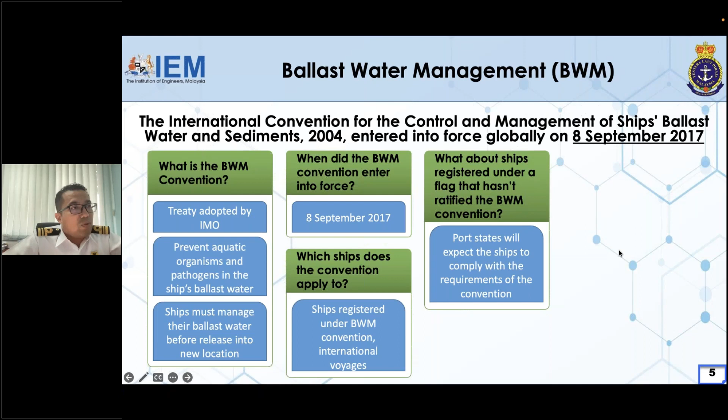A ballast water record book is used to record when ballast water is taken on board, circulated or treated for ballast water management purposes, and discharged into the sea. It should also record when ballast water is discharged to a reception facility, or any accidental or other exceptional discharge of ballast water.

And the International Ballast Water Management Certificate is for ships of 400 gross tons and above. This is issued by or on behalf of the administration, the flag state, and certifies that the ship carries out ballast water management in accordance with the BWM Convention, specifying which standard the ship is complying with, as well as the date of expiry of the certificate.

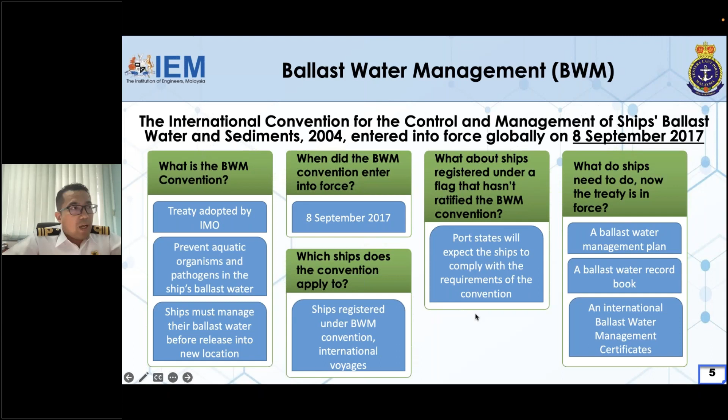The D1 standard requires ships to exchange ballast water in open seas, away from coastal areas, so organisms cannot survive. The D2 standard specifies the maximum amount of viable organisms allowed to be discharged, including specified indicator microbes harmful to human health. Usually, meeting the D2 standard involves installing a ballast water management system.

For background info, all new ships must conform to the D2 standard. Until the date when they must meet D2, existing ships should exchange ballast water mid-ocean to meet the D1 standard. Over time, all ships will have to meet the D2 standard. The renewal survey refers to the IOPPC renewal survey under MARPOL Annex 1.

In 2017, all ships must have the ballast water management plan, ballast water record book, and international ballast water management certificate. Existing ships built prior to 8 September 2017 must meet the D1 standard until their D2 compliance date. New ships built on or after 8 September 2017 must meet the D2 standard.

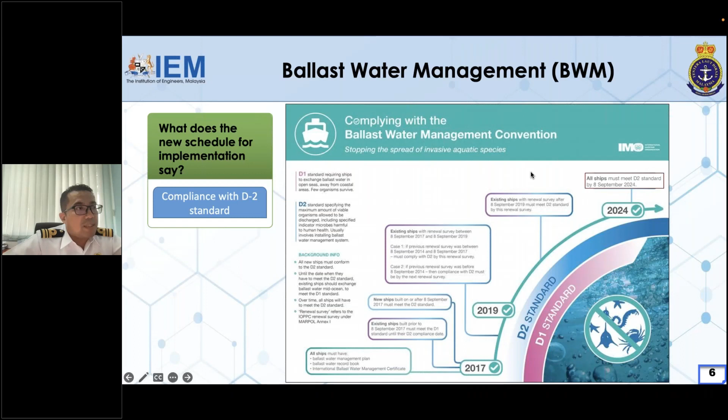Annex 1 is the prevention of pollution by oil. Annex 2 is the control of pollution by noxious liquid substances in bulk. Annex 3 is the prevention of pollution by harmful substances carried by sea in package form. Annex 4 is the prevention of pollution by sewage from ships. Annex 5 is the prevention of pollution by garbage from ships, and Annex 6 is the prevention of air pollution from ships.

MARPOL's main objective is to safeguard against accidental pollution from ships' routine operations and protect the marine environment from ship-source pollution. This convention applies to all ships flying the flag of a member state, or operating within its jurisdiction, including vessels of any type operating in the marine environment such as hydrofoil boats, air cushion vehicles, submersibles, floating craft, and fixed or floating platforms.

Government vessels, including warships, naval and state-operated, non-commercial government ships, are not bound by this convention. I have attached some notes about the duty of the master, which means the ship's captain, to report an incident to the coastal state and flag state or regulation implementers.

Duty of the flag, meaning the marine department, involves casualty investigation, certification, and IMO reporting. Last but not least, the duty of the coastal state involves ship inspection and port facilities. The coastal state can be our marine department if the incident occurs within our nation, or a foreign country's marine department if it occurs outside our country.

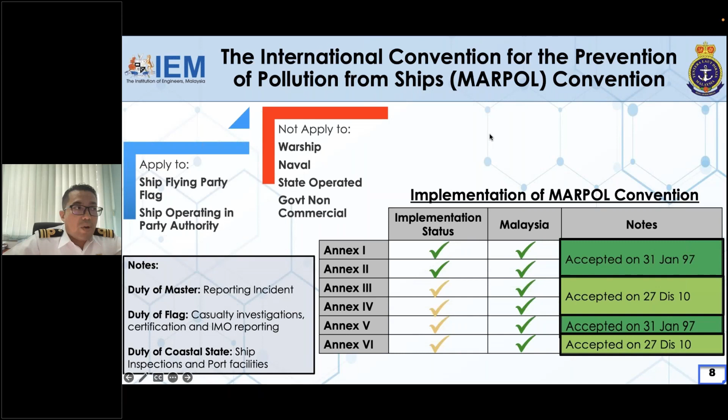The flag may waive requirements exclusively for domestic ships which have a 72 hour voyage plus 50 nautical miles, but those ships shall retain all oil mixture on board for subsequent discharge to reception facilities. The flag may exempt ships temporarily for 90 days.

It provides regulation of oily water separator, oil discharge monitoring equipment, and oil record book to record all oil plus fuel transfer and capacity. Strict design of tankers to be built with double hull and double bottom constructions. Coastal states must provide regulated port reception facilities for oil discharge and loading.

Certification of International Oil Pollution Prevention, 5 years validity plus annual survey, plus a damage control plan, the Shipboard Oil Pollution Emergency Plan, SOPEP.

For Annex 2, it applies to all chemical tanker ships certified to carry NLS. The exception for this annex is the discharge of NLS to sea to save life at sea, or when the ship or equipment is damaged, with reasonable precaution taken. The flag may exempt any waived requirement, but it must be reported to IMO.

Exceptions include ships which carry vegetable oil, ships constructed before July 1986, ships with restricted domestic voyage, or dedicated NLS tanks in ships that are only used for ballast and washing.

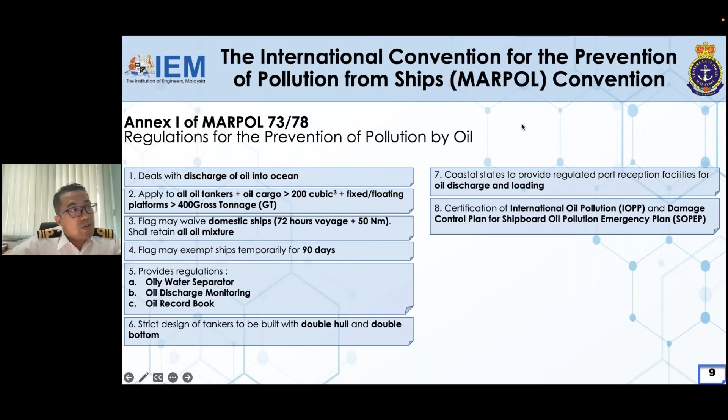The OS category will not fall under X, Y, Z categories and presents no harm to the marine environment and human health. The ship must have procedures and arrangement manuals for X, Y, and Z discharge, plus a shipboard marine pollution emergency plan for NLS.

The design and construction of the ship must comply with the International Bulk Chemical Code, the IBC Code, for ships built after July 1986. The requirement applies to NLS certified ships which carry cargo specified in the IBC code.

Mandatory logs of NLS in the cargo record book. All states party must provide reception facilities for discharging NLS. Ships must comply with the pre-wash of NLS tanks regulation plus the residue assessment.

The certification involved in this annex is the International Pollution Prevention Certificate for the carriage of NLS, which has 5 years validity plus annual survey.

For Annex 3, it applies to ships that are certified to carry HSPF, harmful substances carried by sea in packaged form. It covers the type of cargo carried under the International Maritime Dangerous Goods Code, IMDG code, and ships are required to have proper HSPF packing, marking, labeling, documentation, stowage, and quantity limitation.

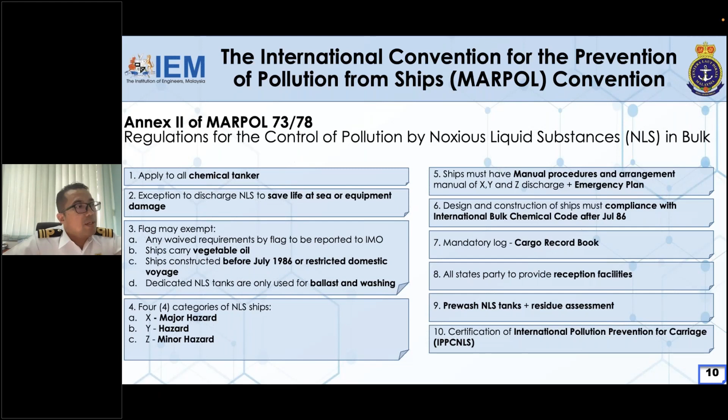The criteria for identification of HSPF are short-term aquatic hazard and long-term aquatic hazard. For the short-term aquatic hazard, the classification purpose means the hazard of a chemical caused by its acute toxicity to an organism during short-term aquatic exposure to that chemical. Availability of a substance means the extent to which the substance becomes a soluble or disaggregated species.

For the long-term chronic hazard, it means the hazard of a chemical caused by its chronic toxicity following long-term exposure in the aquatic environment. For this annex, no certification is required.

For Annex 4, sewage means drainage from toilets plus urinals, medical premises, living animal spaces, or a mix from any of those. It applies to ships engaged in international voyage plus above 400 gross tons plus carrying more than 15 persons.

The exception for this annex is the discharge of sewage to sea to save life at sea, or when the ship or equipment is damaged, with reasonable precaution taken.

The ship must be equipped with a standard discharge connection. The flag must ensure or approve that applied ships have a sewage system consisting of a sewage treatment plant, a sewage disinfecting system, or a sewage holding tank.

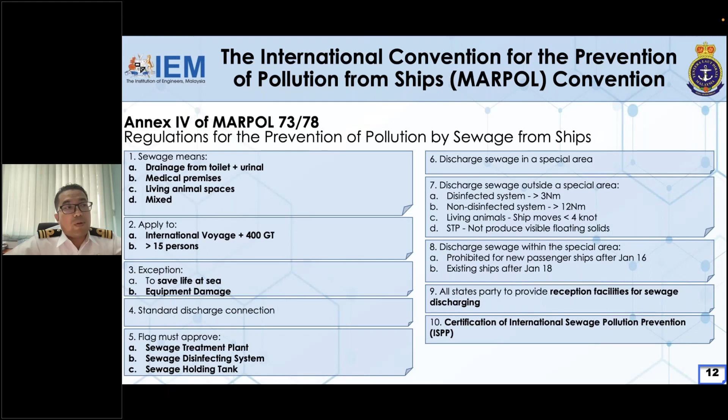Okay, the exception discharge of garbage from a ship is necessary for the purpose of securing the ship or safety of crew, or accidental loss of garbage resulting from damage to a ship or its equipment, or the accidental loss of fishing gear, or discharge of fishing gear from a ship for the protection of the marine environment or for ship or crew safety. The exception is also permissible if food waste presents an imminent health risk to the crew.

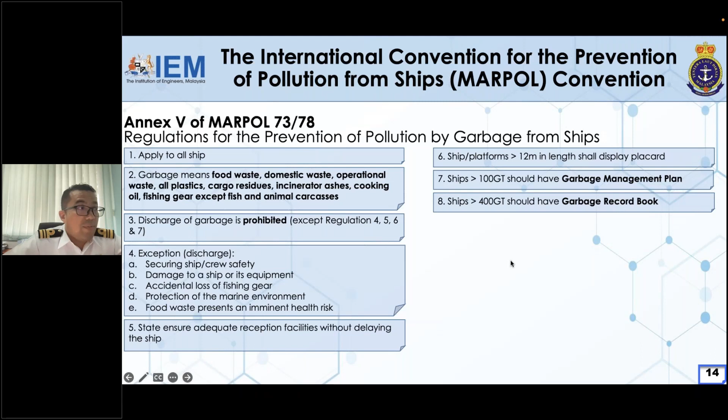Ships must use low sulfur fuel oil, with a target of 3.5% after January 2012, 0.5% after January 2020, and 0.1% for sulfur emission control areas.

A volatile organic compounds, VOC, requirement applies to tankers, which must have a VOC management plan, and VOC is to be reported to IMO. The shipboard incinerator is to be approved by the flag.

So the state party must ensure adequate port reception facilities, fuel oil availability, and promotion of technical cooperation. CO2 emission requirements apply to ships of more than 400 gross tons.

Ships built after January 2017 must comply with the Energy Efficiency Design Index, EEDI. Applicable ships must have a Ship Energy Efficiency Management Plan, SEEMP, and ships more than 5,000 gross tons must report fuel consumption to IMO. The certificate for this annex is the International Air Pollution Prevention Certificate, IAPP, which has 5 years validity plus annual survey.

The International Energy Efficiency Certificate, IEEC, has lifetime issuance without a major conversion or change of flag, and a Statement of Compliance, SOC, will be issued annually.

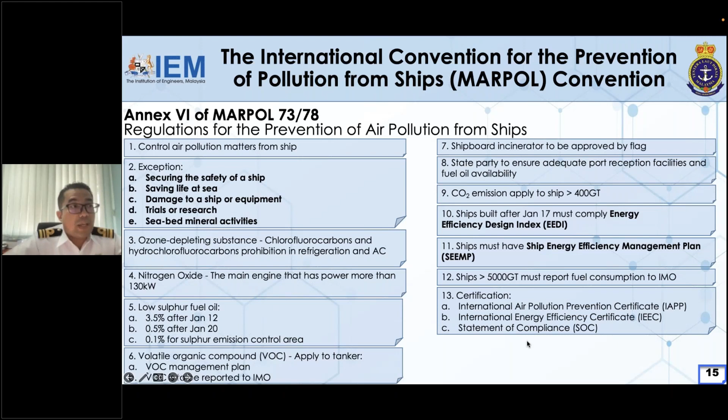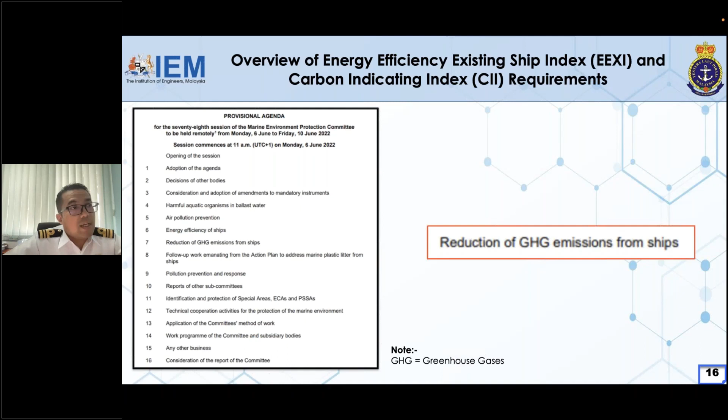The initial GHG strategy was adopted by IMO's Marine Environment Protection Committee (MEPC) during its 72nd session, from 9 to 13 April 2018. Their vision is to reduce GHG emissions from international shipping and phase them out as soon as possible in this century.

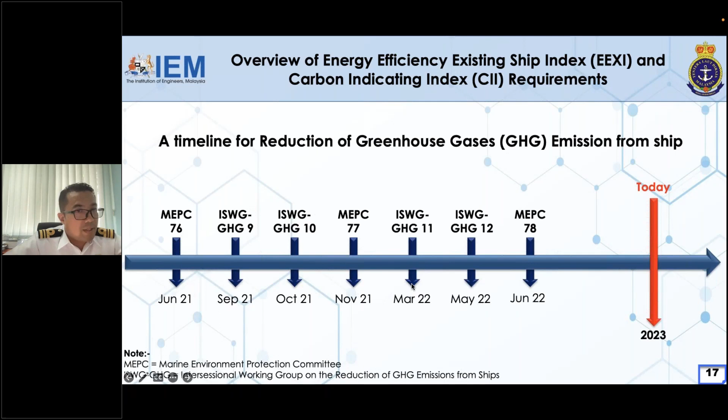So the initial strategy represents a framework for member states: first, setting up the future vision for international shipping; second, the levels of ambition to reduce GHG emissions and guiding principles; and third, candidate short, mid, and long-term measures with possible timelines and their impacts on states. The strategy also identifies barriers and supportive measures, including capacity building, technical cooperation, and research and development (R&D).

The ambition of the GHG strategy is to review EEDI with the aim of strengthening requirements, to reduce the average carbon intensity — CO2 emission per transport work — by 40% by 2030 and 70% by 2050 compared to 2008, and to reduce total GHG emissions from shipping by at least 50% by 2050 compared to 2008.

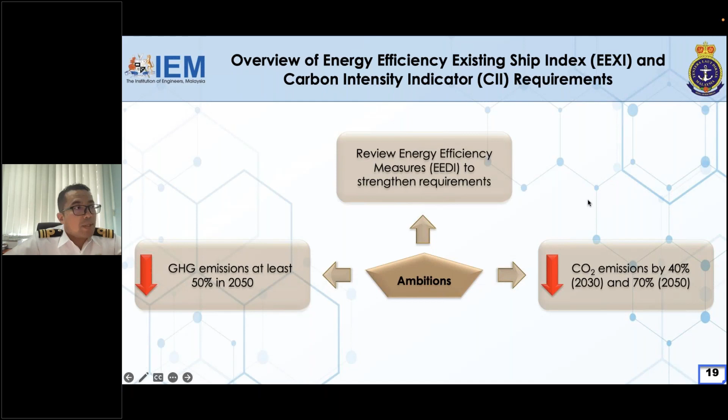After the short-term measures have been carried out, the next step is to implement market-based measures (MBMs). These place a price on GHG emissions and serve two main purposes: to provide an economic incentive for the maritime industry to reduce fuel consumption by investing in more fuel-efficient ships and technologies, and to operate ships in a more energy-efficient manner, resulting in sector reductions. Hopefully, after successful implementation of short and mid-term measures, the long-term measures will result in a zero-carbon environment.

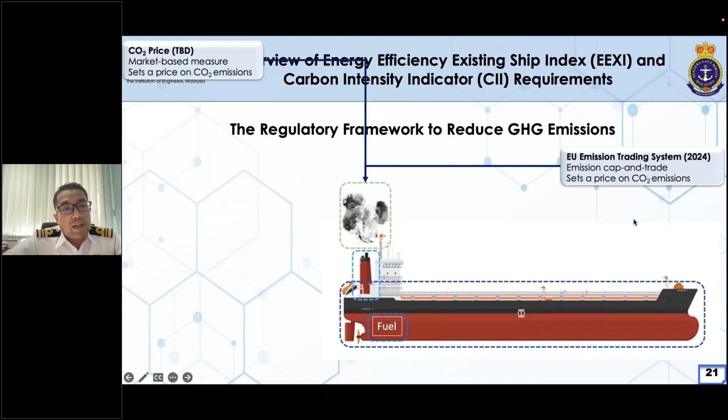Then there's SEEMP3 in 2023, a management requirement for continuous carbon intensity improvement. We also have the data collection system, SEEMP2, from 2019, for reporting actual fuel consumption and CO2 emissions. And SEEMP1 from 2013 is the management requirement for continuous energy efficiency improvement.

We also have the European Monitoring, Reporting and Verification of CO2, EU MRV, from 2018 — reporting of actual fuel consumption and CO2 emissions.

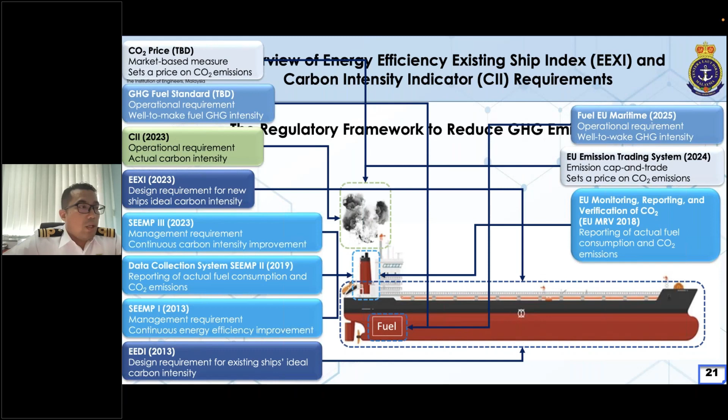There are two short-term approaches. The first is the technical approach, the Energy Efficiency Existing Ship Index (EEXI), which introduces an energy efficiency index for existing ships. The required EEXI is almost the same level as the required EEDI for new ships as of 2023. The second short-term approach is the operational approach, the Carbon Intensity Indicator (CII) rating. The ship is rated on a scale of A to E based on annual operational carbon intensity. A ship rated D for three consecutive years, or rated E, must submit a corrective action plan.

So what are EEXI and CII? The EEXI is a measure of a ship's energy efficiency per transport work — a one-time certification targeting design parameters. The CII addresses actual emissions in operation, measuring how efficiently a ship transports goods or passengers, given in grams of CO2 emitted per cargo carrying capacity and nautical mile. The ship is then given an annual rating ranging from A to E, with the rating thresholds becoming increasingly stringent towards 2030.

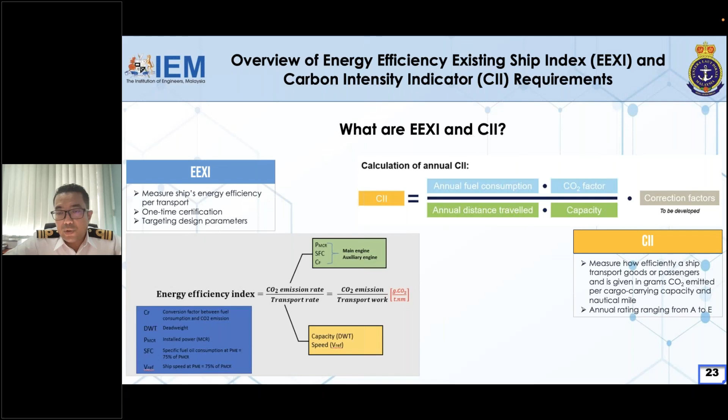We will comply with this. After January 2023, we have complied, and then the IEE certificate will be issued. Then the way forward is to get the new International Energy Efficiency certificate.

So the process: issuance of EEXI technical files, including the EEXI calculation, with responsibility from the ship owner or manager, then submission to class, and approval of the EEXI technical file, for which the classification society is responsible. The EEXI is verified, and the EEXI technical file is kept on board. Then the onboard survey and issuance of a new IEE certificate, with the classification society acting on behalf of the flag state.

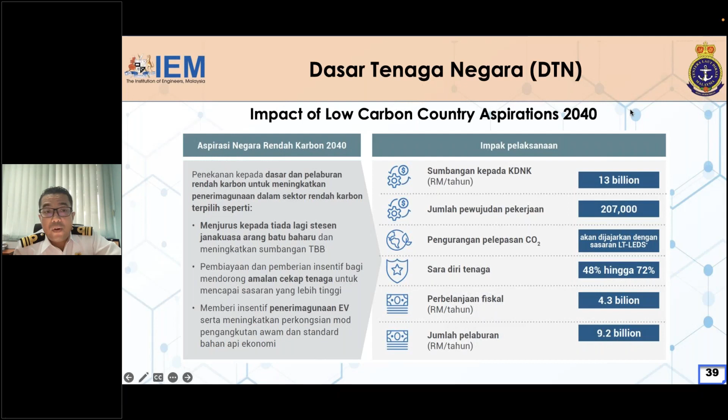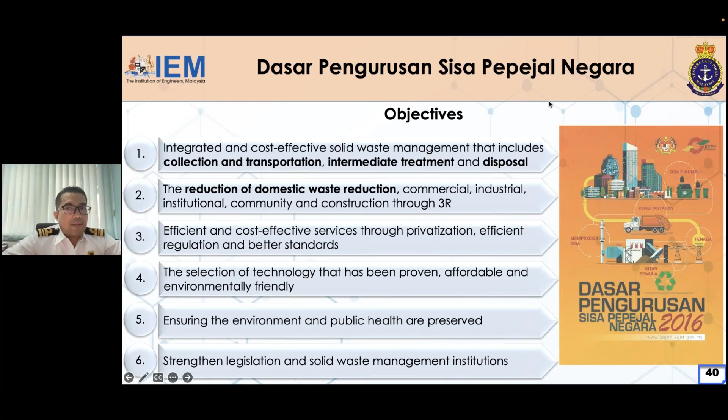This act and guidelines actually only cover the mainland. In the sea region, the Marine Department will take over under IMO.

Our next scope is the commitment of the Marine Department and also RMN, Royal Malaysian Navy, in implementing measures for this cause.

For the Marine Department, I will use the Recognized Organization Instruction 2022 as the reference. The RO appointed by the Government of Malaysia pursuant to Section 10(2A) of the Merchant Shipping Ordinance 1952 are authorized to review and approve appropriate plans and documents.

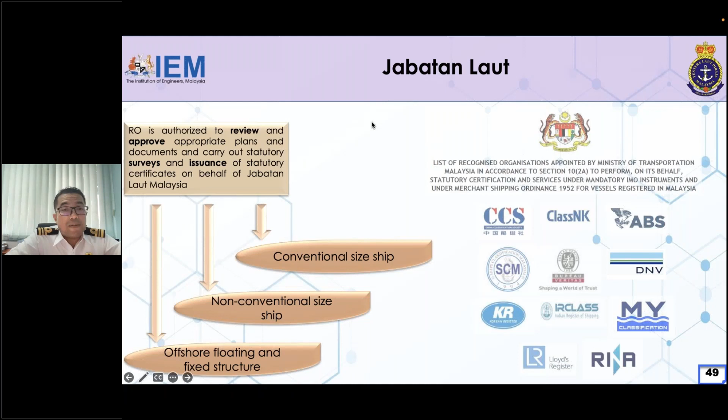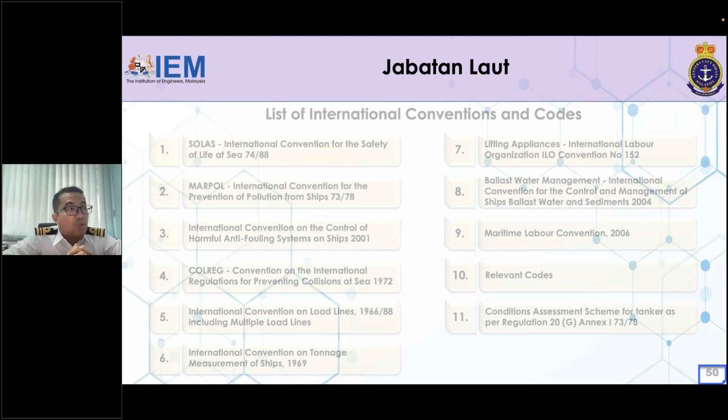In the event that the condition of the ship or its equipment does not correspond substantially with the particulars of the certificate, or is not fit to proceed to sea in a way that poses a danger to the ship or crew on board or the marine environment, corrective actions are to be taken immediately to rectify these shortcomings. In cases where corrective actions cannot be taken due to unavailability of spares, the relevant certificate or certificates are to be withdrawn and shall be notified to the administration immediately.

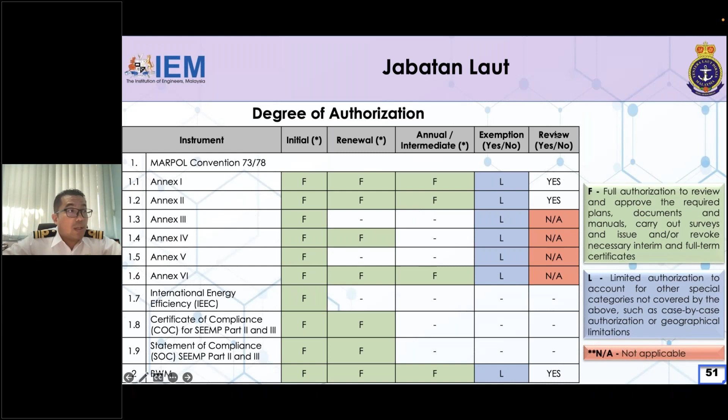This is actually what's done by the RO, or Jabatan Laut. The first is the survey. Generally, all vessels shall be surveyed before being put into service and shall comply with all international conventions and national regulations. The RO shall review and approve appropriate plans and documents related to international conventions or codes, and then perform the annual inspection and issue a report.

For the certificate, the RO is authorized to issue a short-term certificate, maximum 3 months, under some conditions. A statement of compliance by the RO may be issued for compliance with conventions not ratified by Malaysia. The flag administration shall be given access to the vessel status through the RO website. The data that the RO gets must be put into the website, allowing the flag administration, our marine department, access to the vessel information.

The RO also issues all statutory certificates on completion of surveys and interim inspections under some conditions, and shall notify the administration immediately in the event of suspension or withdrawal of any statutory certificates.

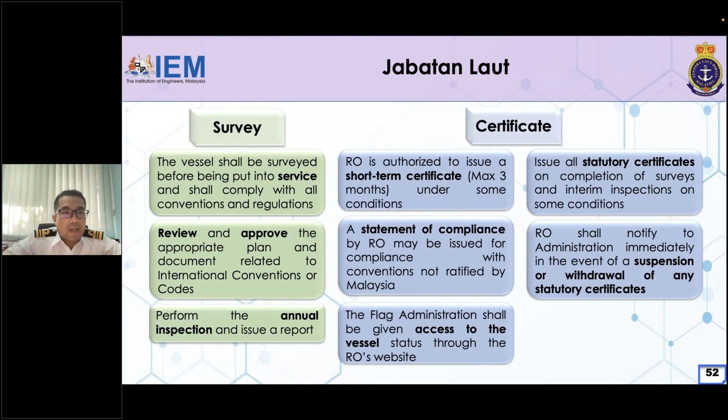For exemptions, the RO is not permitted to issue an exemption or extension certificate unless authorized by the administration. No extension shall be permitted for a single hull or single bottom oil tanker and passenger ships. The exemption certificate may be issued without approval from the administration only for, quoting from the pollution case: the water ballast management certificate and plan for a ship not carrying ballast water or permanent ballast, and the exemption of unmanned non-self-propelled barges from certain survey and certification requirements under Annex 1 and 4.

For additional instructions, the RO is authorized to carry out testing and issue type approval certificates for equipment and machinery to be installed on board Malaysian vessels, authorized to review and approve the SEEMP Parts 1, 2, and 3 and issue the IEEC, authorized to review and approve the installation of EGCS, the exhaust gas cleaning system, authorized to appoint service providers related to survey and certification of ships, and authorized to issue oil record books, garbage record books, ozone depleting substance record books, on and off status of marine engines, fuel oil changeover, and engine parameters.

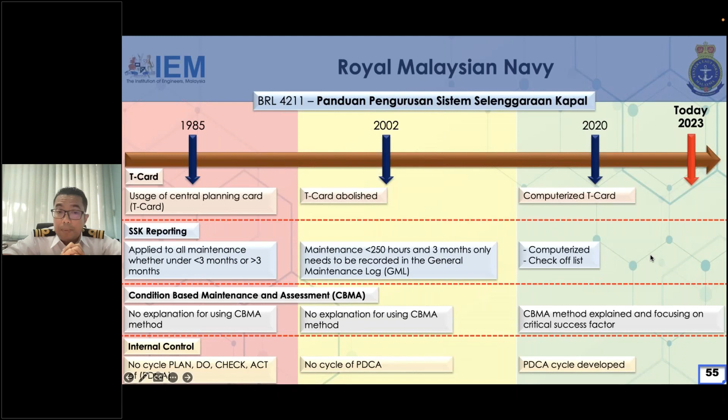The second level is intermediate level maintenance, involving the fleet maintenance depot and our workshop, using supporting and additional equipment, with more manpower, skills, and knowledge required to do this maintenance.

The third is depot level maintenance. It requires critical resources and special tools. This maintenance is beyond the capabilities of the ship staff and the base staff, so it is done with the OEM.

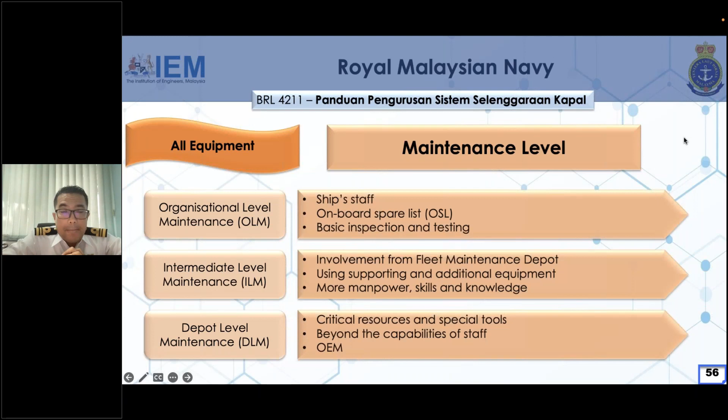Based on this BRL, we can see that some of the documents are related to the IMO. The names of the documents might be different, but have the same meaning. Actually, the RMN has implemented maintenance based on references using the Royal Navy standard, which precedes the MARPOL Convention.

As you can see in the list I've marked on the figures, we have the General Maintenance Log, GML, which is part of the ship, and then we have watchkeeping, and then maintenance for 250 hours and 3 months and below.

Followed by the PMS, Plan Maintenance Schedule, and then we also have the pre-sailing check, start and stop routine, the borang pre-sailing check, and borang rutin pengoperasian sistem dan peralatan.

We also have the Engineering Master Log, EML, BAT M 2103. From this we have to record our main engine and our genset, and then record our support equipment, and our usage of fuel, lube oil, and hydraulic.

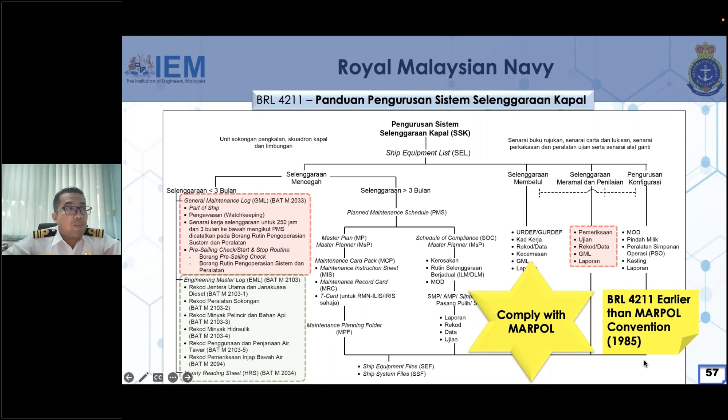The operational level consists of naval logistics, which is responsible for readiness audits and unplanned audits to ensure ships and boats are always in good condition. The ships and boats will carry out maintenance based on the PMS, Plan Maintenance Schedule, and must ensure all equipment and spares are ready at all times.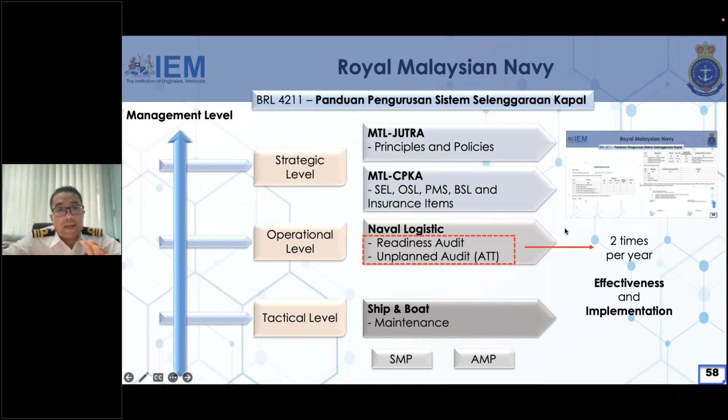I repeat again, the ones that I highlighted are equipment involved in the MARPOL convention. Examples include repair of the sewage treatment plant, upgrading or change of the main engine system, servicing tanks, and many more.

As Royal Malaysian Navy engineers, during major maintenance we have to ensure that all equipment is operating accordingly. Indirectly, this will help avoid pollution in many ways.

If ships are involved in any exercise, especially in international waters, we have to obey certain rules and regulations. For example, during the RIMPAC 2022 exercise, KD Lekiu, one of our warships, had to comply with United States regulations. We had to get the certificate of approval on our sewage treatment plant before our ship was allowed alongside the Hawaii Naval Base.

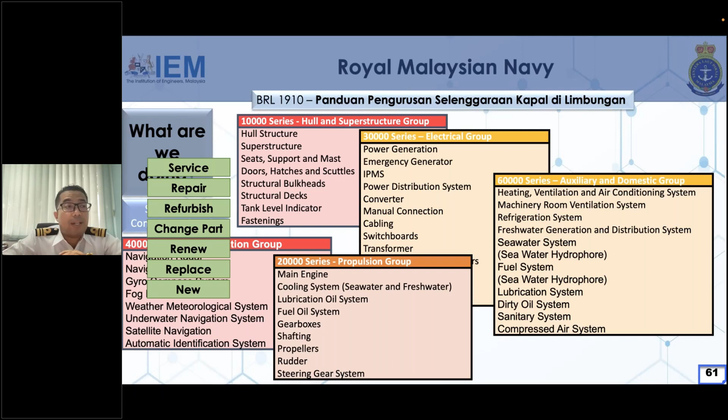Okay, next is the Buku Rujukan Laut 3000, the Marine Engineering Manual.

In this BRL 3000, it clearly states that the Marine Engineer Officer is to take all necessary precautions to avoid the emission of smoke and the pollution of the sea by oil or other substances. The Marine Engineer Officer is to be familiar with the provisions of the International Conventions for the Prevention of Pollution at Sea, MARPOL, which should be followed as best as possible, although warships are not legally required to do so.

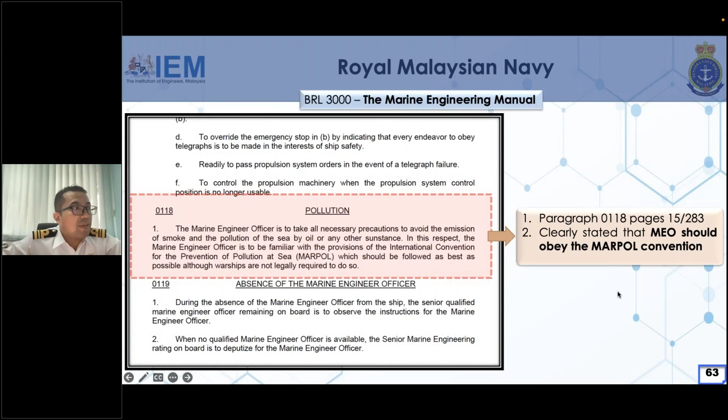Next is the Memo A Markas Armada. The safety assessment and readiness check is a document containing guidance and a checklist. This document is well designed and used as a reference when conducting an inspection focusing on the engineering and safety aspects. This document is applicable to all RMN ships and boats.

The identified and listed systems and equipment in this guidance are flexible and must be tailored to the vessel systems and equipment that will be inspected. The purpose of the document is to evaluate and identify the level of seaworthiness, readiness, and safety for the RMN ship and boat before going to sea.

It also evaluates and assesses the level of competency, understanding, knowledge, and skills of technicians, operators, and staff onboard regarding the operation of the system or equipment under their responsibility, including completion of maintenance routines or repairs. It then identifies improvements that can be implemented.

The scope for the SRRC involves a wide range of systems and equipment. It can be divided into several elements: engineering, navigation and communication, DCFF - damage control and firefighting, life saving and rescue equipment, and also ship aviation pre-embarkation.

On completion of the inspection, the technical seaworthiness report comprises all findings, summary, recommendations, corrective action, recovery, and other related information that must be adhered to. The report must be submitted to the commanding officer of the vessel, Naval Logistic Headquarters, Western and Eastern Fleet Headquarters, and other related depots or organizations for further action.